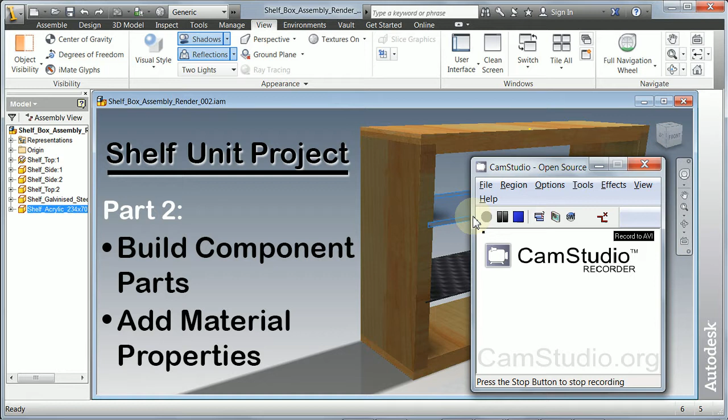This is part 2 to our shelf unit Inventor project. We're going to continue building the individual component parts, and we're going to add material properties to make them look realistic.

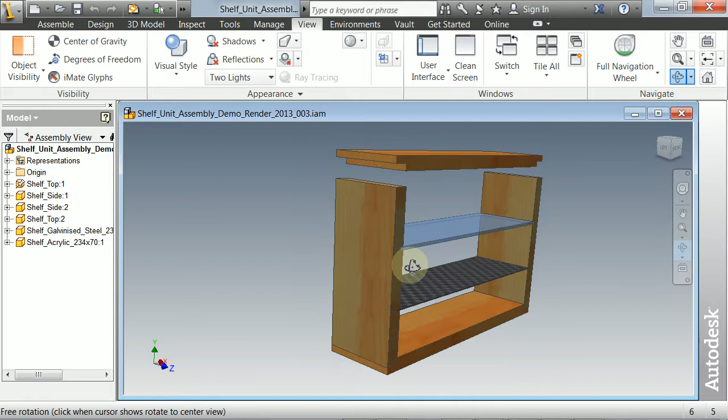So here is our assembled shelf unit. We've made the shape for our top section, which is the same as the bottom one, and now we're going to look at the side part here, the side panel.

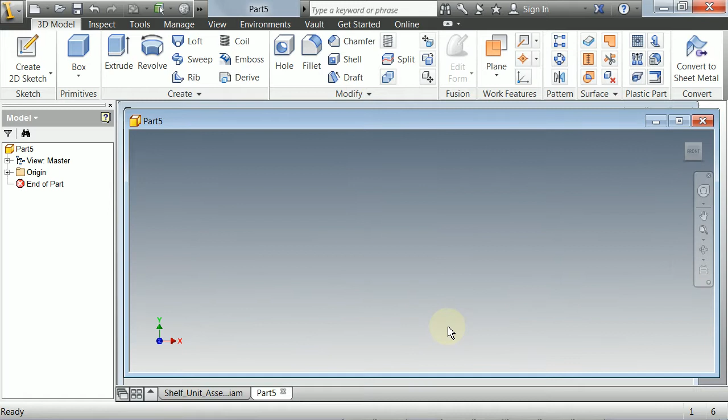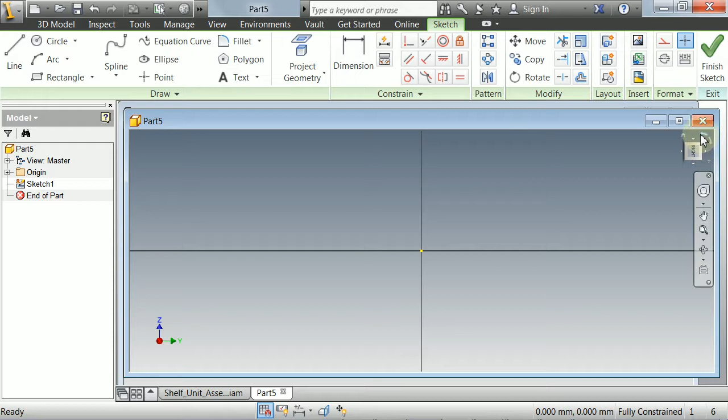So I'm going to create a new one, new metric standard millimeters, and a 2D sketch. In this case I want to make this in the correct orientation so it's easier to assemble. I'm looking at Y and Z there, so I'm going to do the side on, and make sure Y is facing up the way before I start. So I'm going to create a rectangle.

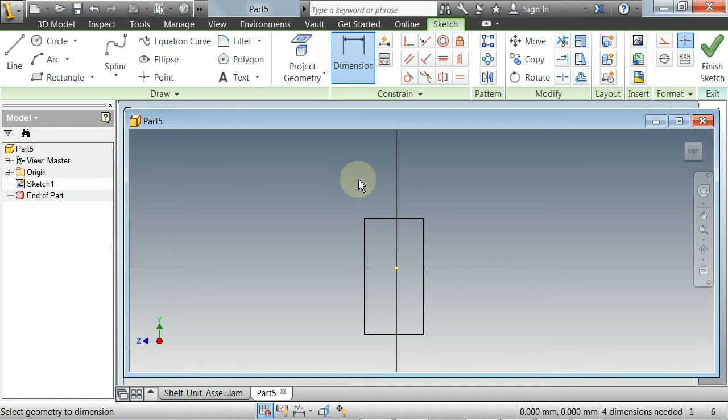Referring back to my sketches, I've got the size I want here: 150 high and 70 across, and I've got the spacing for my slots as well. So first I'm going to dimension that: 150, and also I know that's 70 wide.

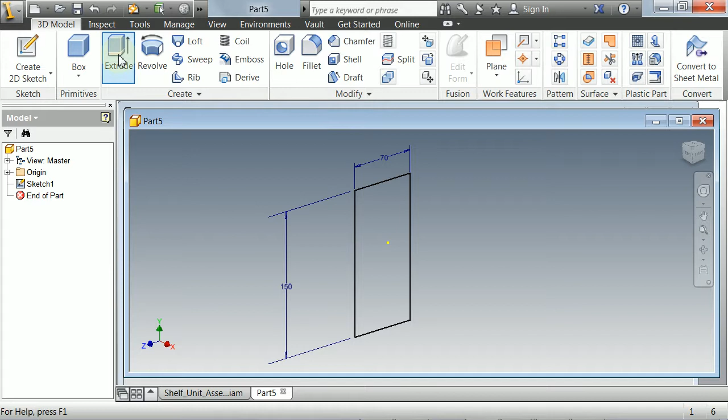So that's the first part complete, so I can finish that. Now I'm going to extrude that to make it 12 millimeters, same thickness as the other one. Hit OK on that. Now I've got my basic shape.

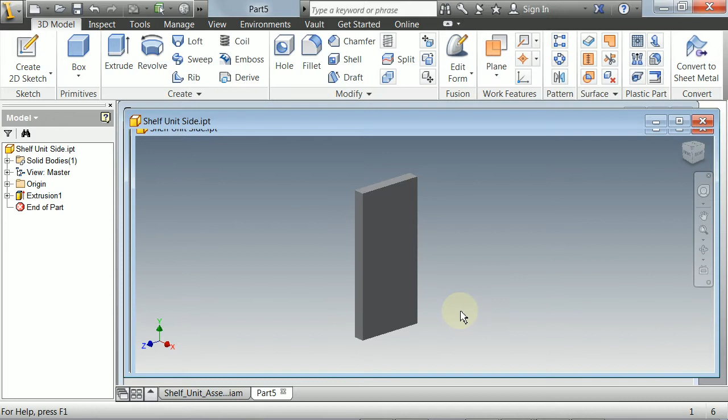So I'll save this now. I've got shelf top, shelf unit side, I'm going to call it that so it makes sense. Sensible name.

Now, when you save things, Inventor reorientates it the way it likes it, but I don't. I want to continue with mine Y up. So what I'm going to do is just rotate that around so that is the actual way I want it to be, and hit escape to come out of that.

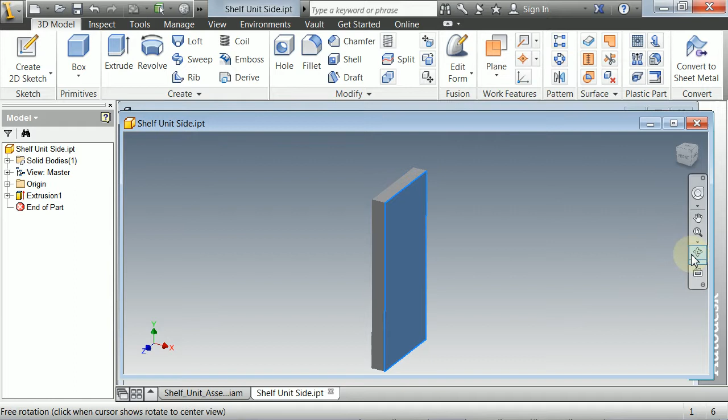To help myself with this, I can use, near this cube, there's a little arrow there. You can set current view as home, fixed distance. What that means is when I'm working I can tumble this around, but if I want to go back to my original position, I hit the home button and now it's orientated the way that I want.

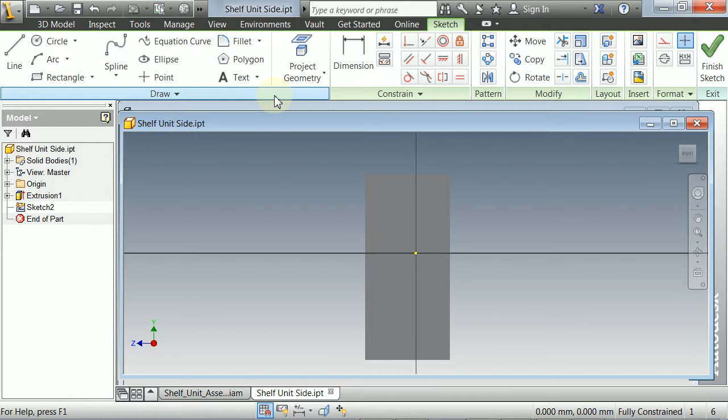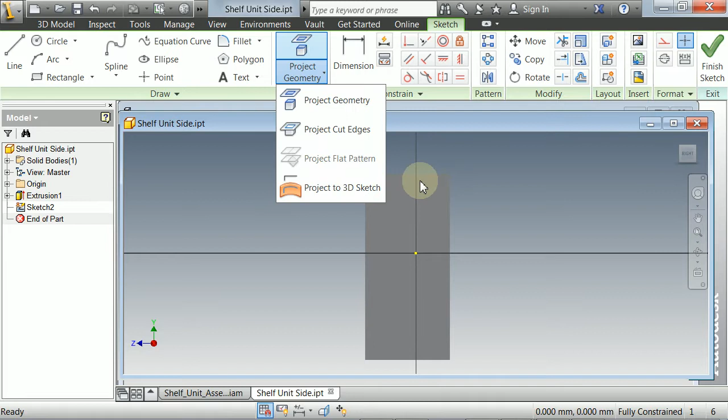Next stage is I'm going to create my second 2D sketch on the surface I'm looking for. In this case I'm going to use the project geometry button, which allows me to select the edges of this rectangle. You need to hold down shift to select them all. When it goes yellow, that basically draws a line around the edge of my existing rectangle.

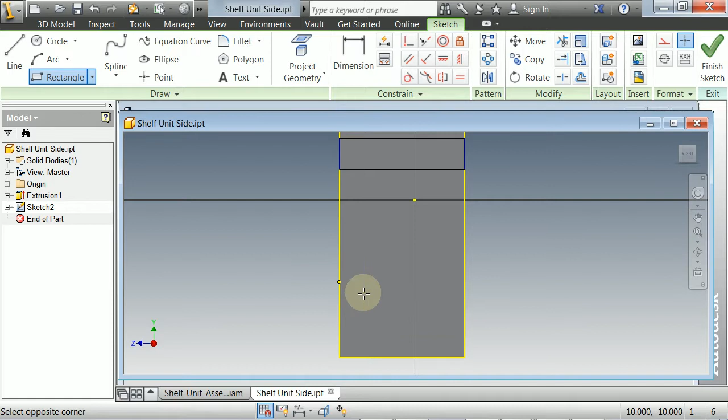So the next stage I'm going to do is draw my rectangles for the through housing joints. So I've got one here and one here, and referring to my drawing, I can now size these.

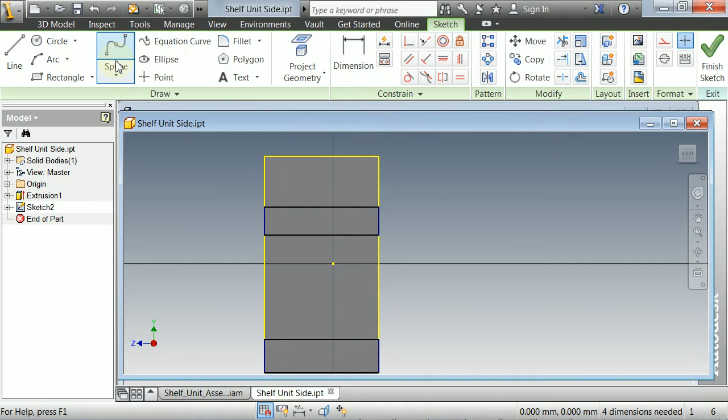So if I look at my original drawing, I've got the acrylic at the top, or my render in this case, acrylic at the top, just 3 millimeters wide. So I can dimension that rectangle there, so I want that to be 3, and I want this one here to be 1.2, which is the thickness of the galvanized steel.

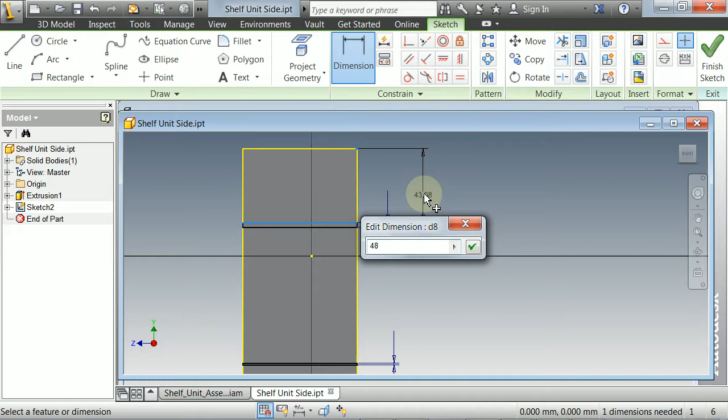So similarly I can now dimension the spacing on that, which is 48, and also from here, which is also 48, and now I've got my rectangles in the correct position.

So I can go finish sketch, that's gone back to my home position, and now I'm going to extrude out those through housing slots.

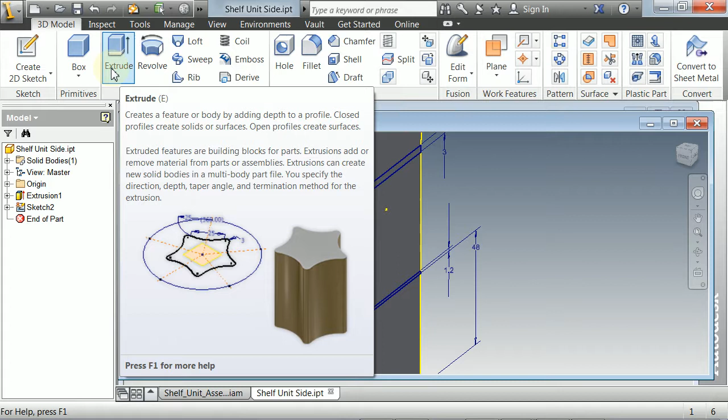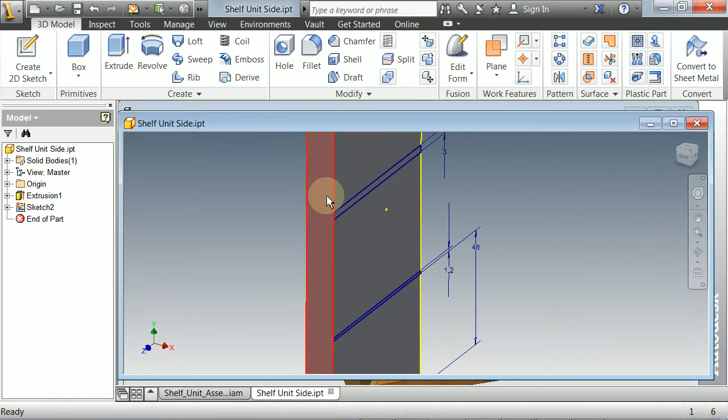So extrude function, I'm going to make sure I'm selecting the area that I want. In this case it's the narrow bit, so that's poking out the way at the moment. So I'm going to change this depth to 4 millimeters, which is what I've decided before. And again I'm going to flip that around so that is going in the way rather than out the way.

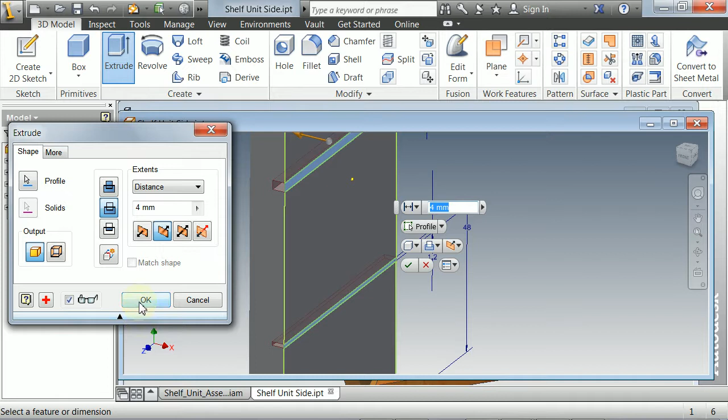And now that is the basic shape, so now we've got this complete. So save that, it's a good time to save this.

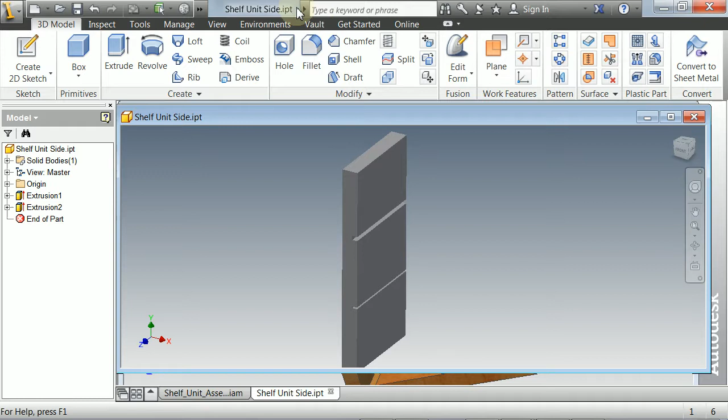Okay, so next stage I'm going to look at is adding some materials to this. So up the top here we've got appearance, which is the material side of things, and to the right of that we've got a drop-down menu which gives us a list of different materials that we have available.

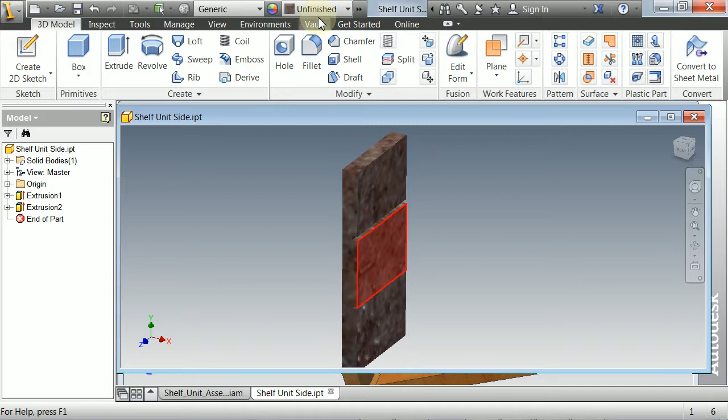You've also got the Autodesk Material Library and various options there. I've also got my favourites which I've set up already. So as you can see, I've already clicked on some random material there and it automatically updates.

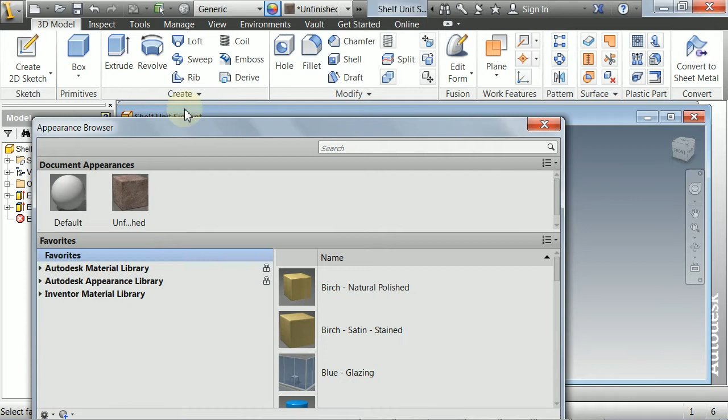So the one I'm looking for in this case is I'm going to look at my favourites. So I'll click on appearance there, favourites are here, and I'm looking for my wood pine material. I have to select whole object.

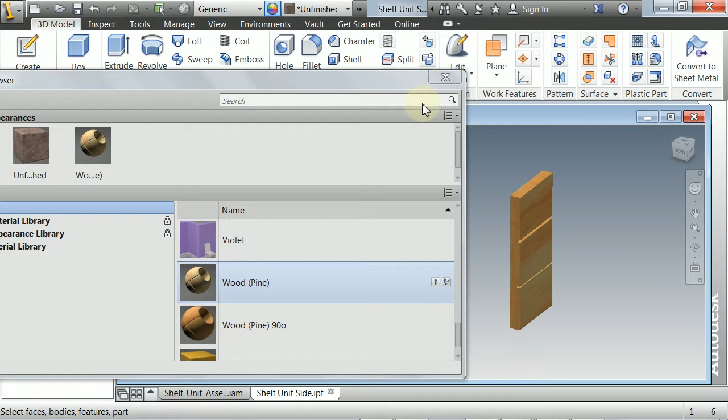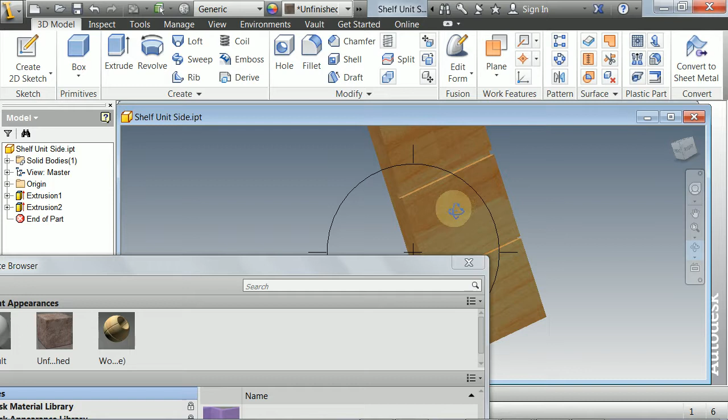Now we have a wood-like material. The thing that I'm not entirely happy with is that when we create this, it's going to be one long piece of wood cut into sections. But at the moment the grain is going across the wood, and I would prefer it to be along the wood, which would be correct.

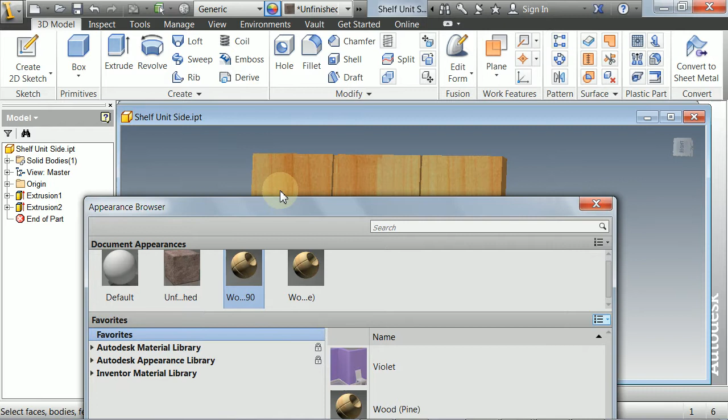So what I'm going to do is duplicate that material and give it a second name. I'll call this 90, because it's going to be at 90 degrees. If I double click on this I can start to edit it. Just want this out of the way so I can see it, and make sure I've got the right one, 90.

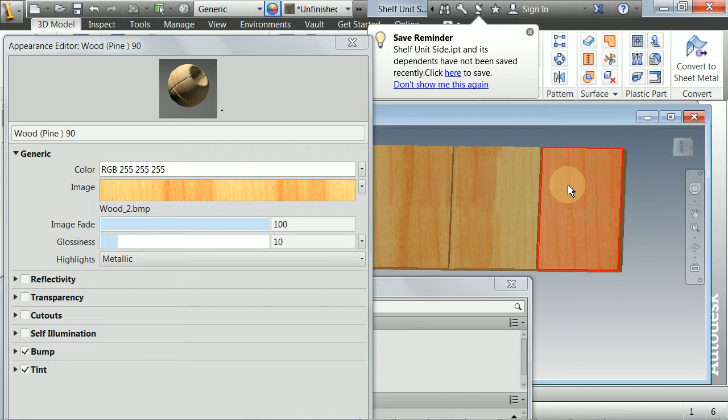Now what I want to do with this is I've got my material - up here we can see this wood is called wood 2. I'm going to click on this arrow on the right hand side and go to edit image. I can drag that along.

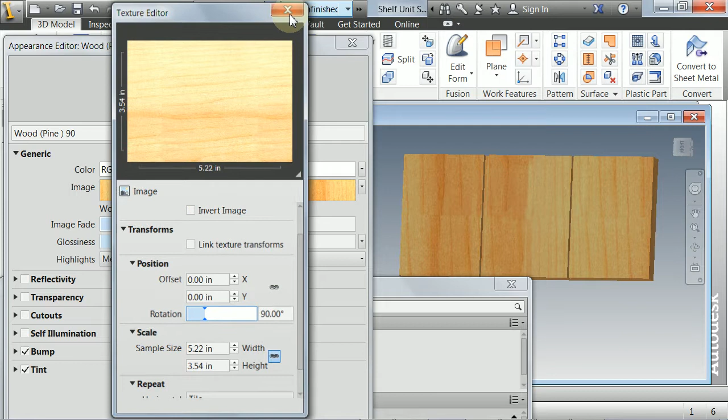The first thing I haven't done is assign this, so I can't tell if it's doing anything. So select that again, assign that material, double click on it, click on the image, edit image, and start rotating that around - you'll see that begins to update on the screen there. So I want to make that straight across, I'm going to make that 90.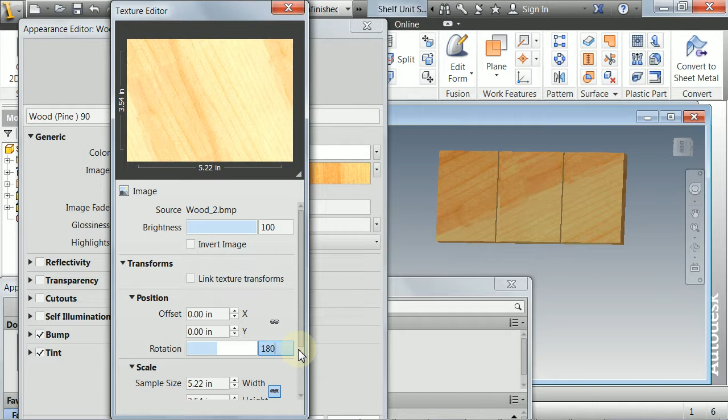You've got all these other settings as well, so you can change the position of it too, which alters the position if you're not entirely happy with the way it looks.

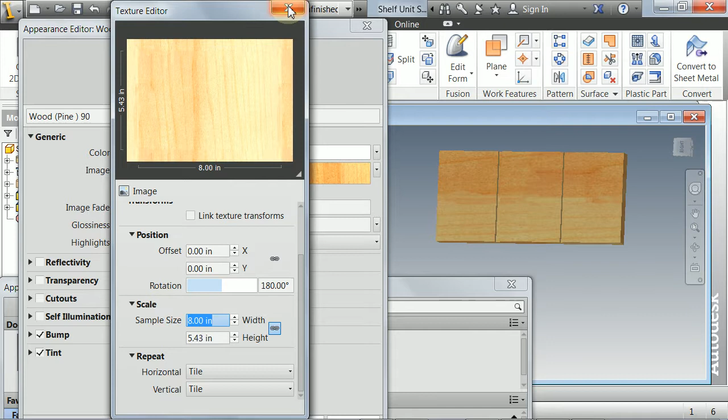So that's that - now I've saved that edit, and I can add that to my favourites as well, so I can reuse it if I wish. I've already got one under that name, so it's going to come down here. But now I've got my 90-degree one added to favourites, so I've got my standard one and my 90-degree one.

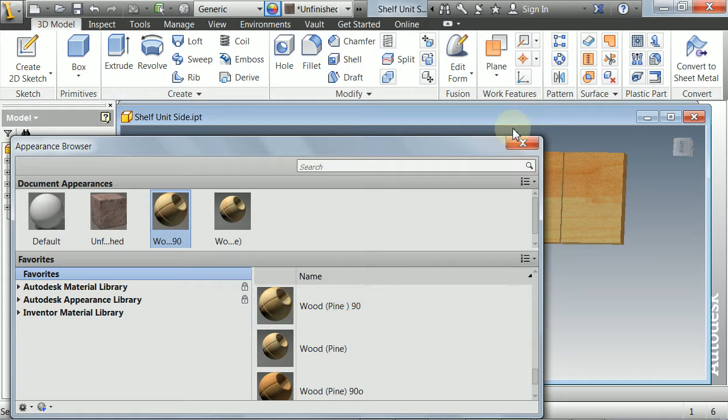Now you can see we have got a wood textured material, and that's ready to save. So go back to home, and I'm going to save that. So when I open my original...

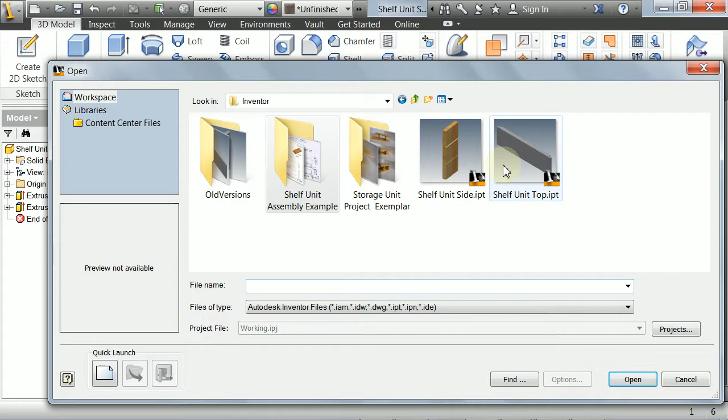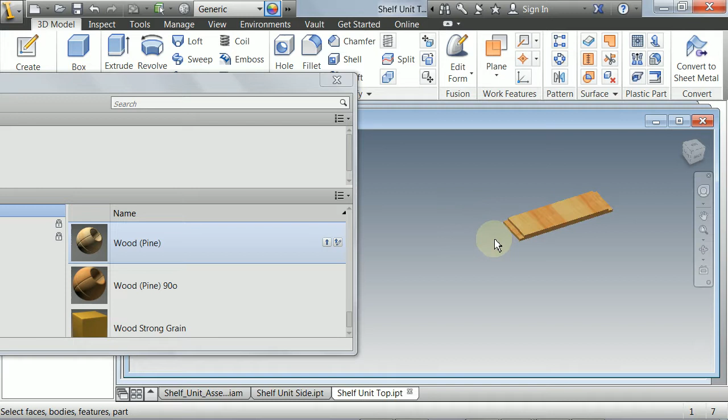...top unit, which I didn't do the material for yet - same thing again, I've got that open. I'm going to select the materials. I've got my wood in my favourites, so I double click on that, assign to material, and make sure the grains go in the correct way. That is ready to go, so save that.

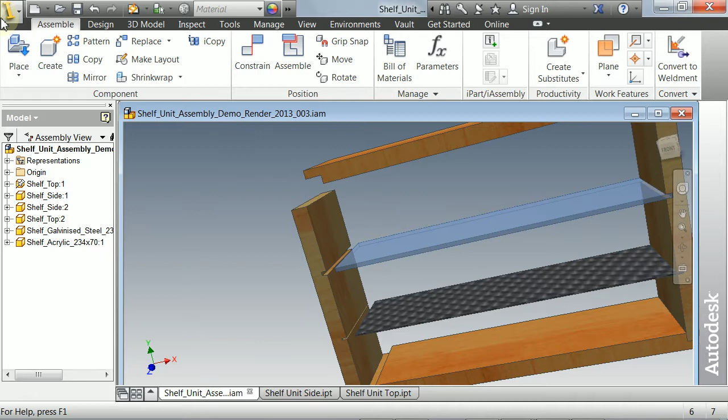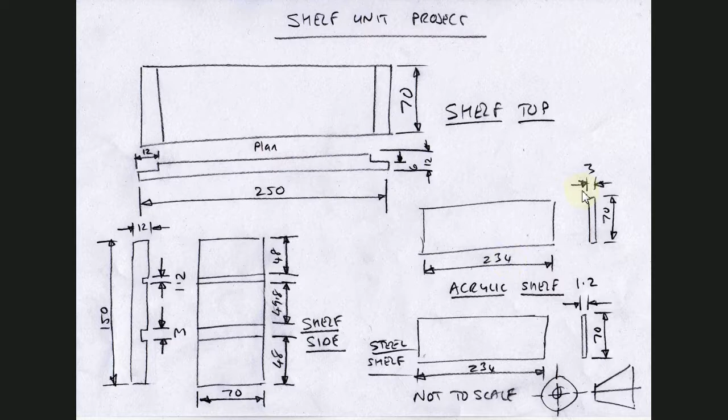So now we've just got the two shelves to make. New, standard millimeters, create. I'm going to create a 2D sketch - I want this one on the top, so I'm going to select that one. Rectangle. From my drawing, I can tell that this is going to be...

...234 across and 70 wide. So, dimension tool, 234, hit the enter button there, dimension for the width, which is the same as the other pieces, 70. Finish that.

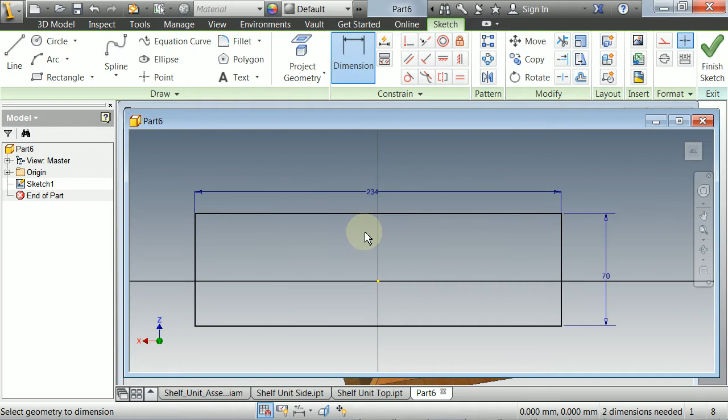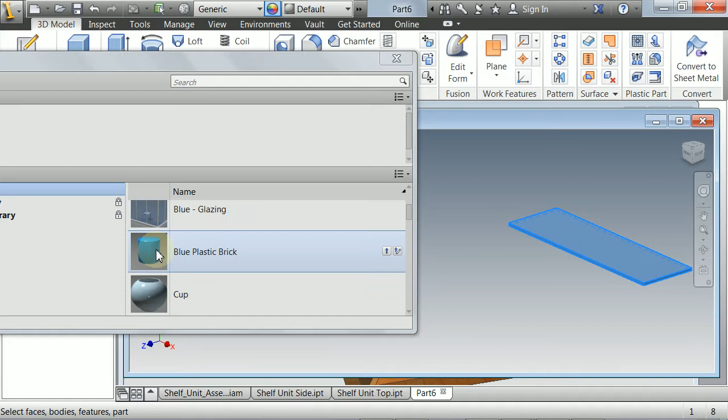Now I'm going to use extrude, and this time I want this to be 3. I'm going to click on my materials button. Now I've got one here called blue glazing, which is close to what I want. So select this, assign to selection - and this one is slightly transparent, which is what I was after.

Save this piece now, save as shelf unit, acrylic shelf.

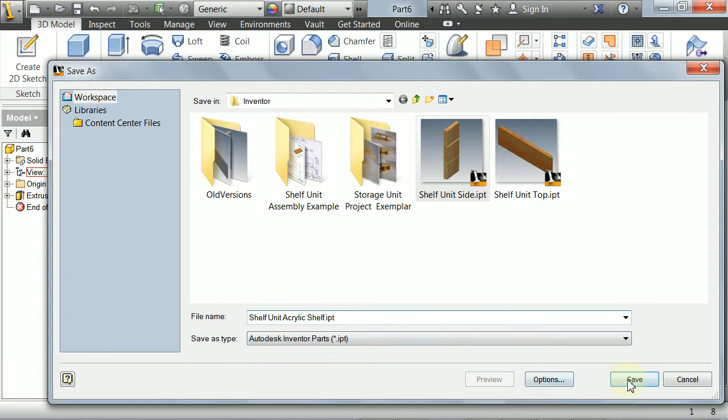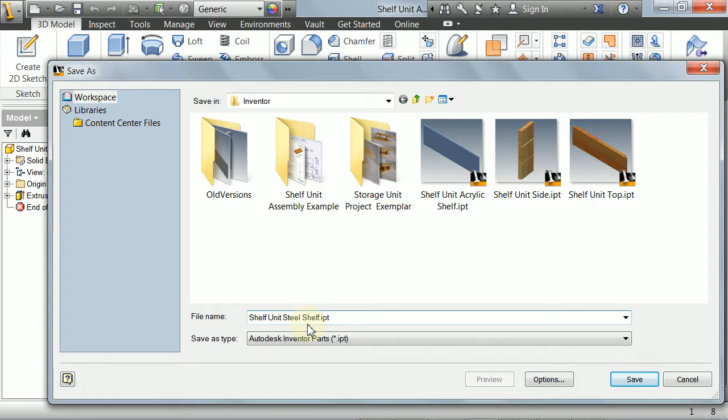So this time, rather than creating a new one, I'm going to use what I have already, because it's more or less the same as the metal shelf. So I'm going to make sure first of all I save that as a separate name, so I don't overwrite what I've already done. This time I'm going to call it steel shelf. Save that, and you can see that's been updated here.

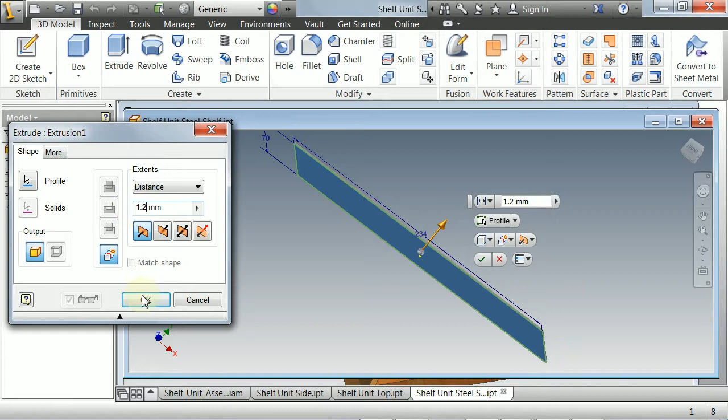So to change this, it's the same width, same height, so basically it's the thickness that I need to change. To do that, I can click on the extrusion button, and I'm going to change that to 1.2, which is the same depth I had - the same depth as the slot which was cut in the side.

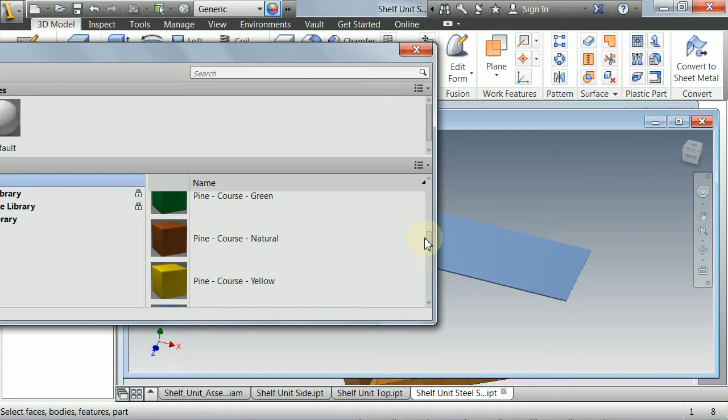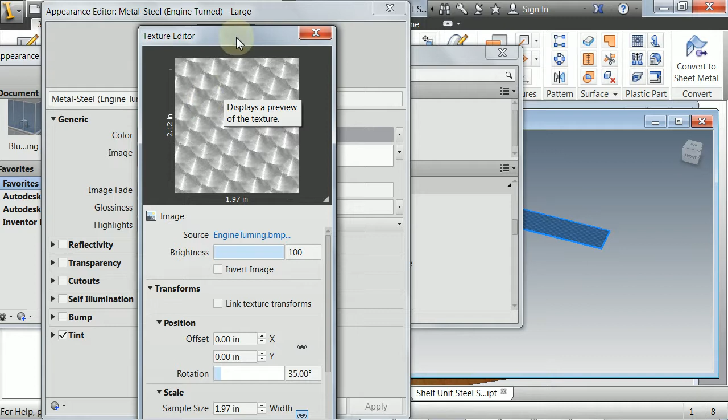So the last thing I need to do is select the object. So down here I have, hopefully, a different material, and this time I open it up. This is a metal effect one, and it has this effect here, which is created by a spinning wire roller around a drill piece, that simulates an engine turned or CNC type effect. If you look at it closely, it shows that on the material holistically.

Okay, so I can save that, and that is my components complete.